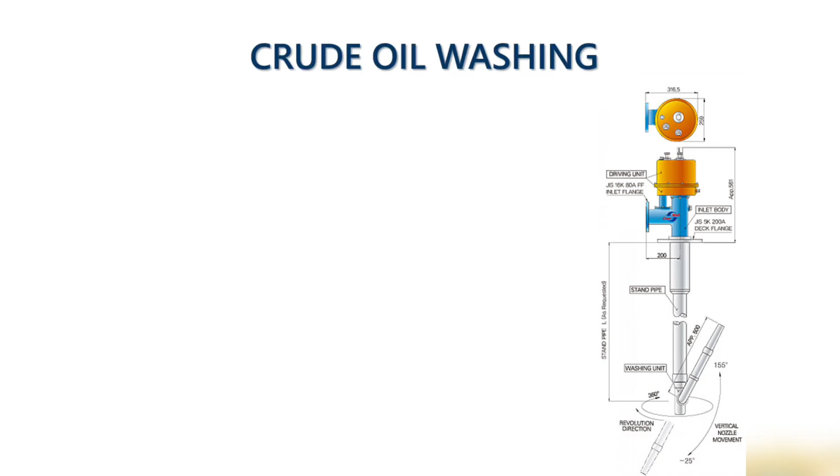And once the vessel goes alongside, discharges the oil, but sediment remains on board. The discharging is still carried out in the same way, through the ship's pump. The pumps can discharge only the liquid; they're not designed to discharge the solid part. So solid sediment used to remain on board.

So the receiver on the other side always used to receive less cargo than they had paid for, because the sediment, the solid particles, the sludge is also a part of the crude, which they never used to receive. So they are always losing money on that. They are receiving less cargo than what they have paid for.

Because ships also cannot do anything. This is unpumpable. This solid particle stays at the bottom and we cannot pump it out unless somebody goes down and shovels it off. So there was a loss of cargo. Receivers were not so happy.

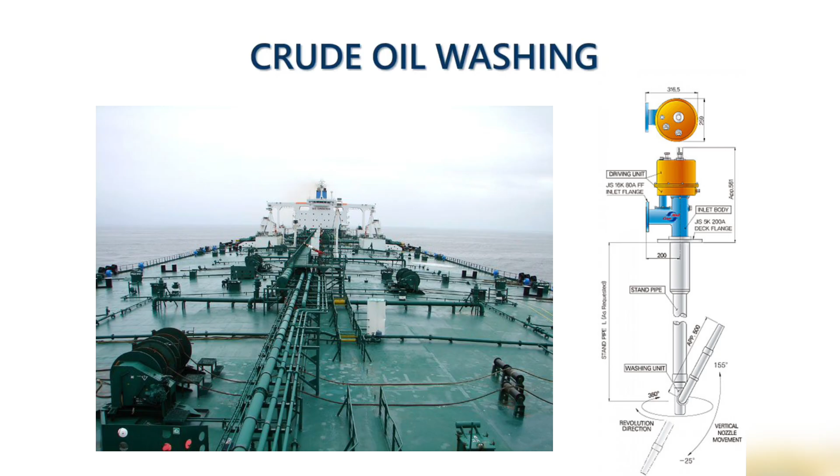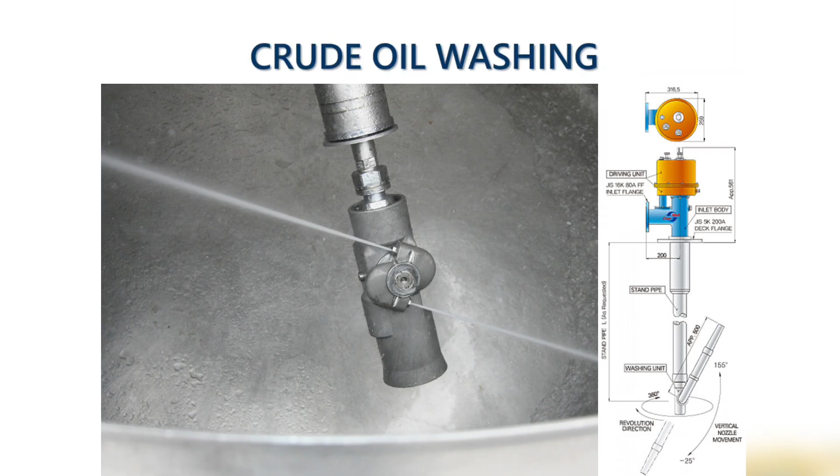On the other side, ship owners: when these sediments are settling down at the bottom of the tank, after every discharging the sediments are increasing. Because of these sediments, the total oil carrying capacity of the tank is reducing. So they are also losing freight, because the space is reducing every time because of these sediments, which are unpumpable. So they are also losing on the freight. Ship owners are losing, and the receivers, charterers, are also receiving less cargo.

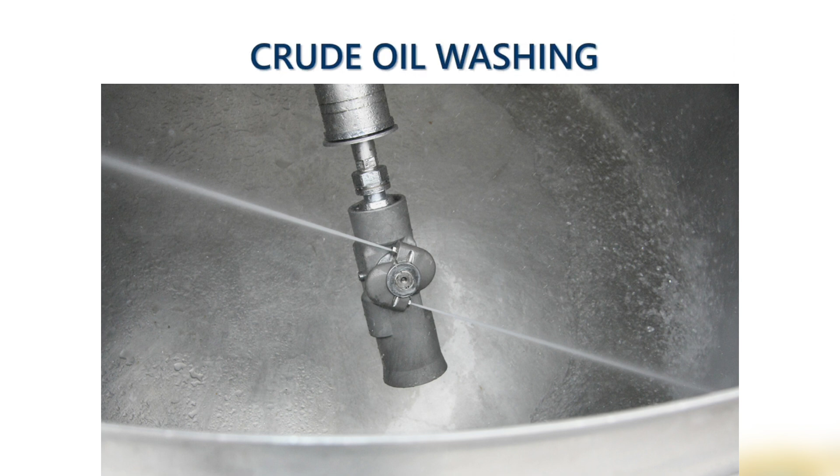Then ship owners decided that they will come out to the sea after discharging, wash these tanks with seawater, and throw this oily water overboard. Oily water along with a little bit of sediment would have gone. So by doing this, they started polluting the sea in a big way, so that they can achieve the freight the ship is designed for. At least they can carry the amount of cargo the ship is designed for. But in the process, they started polluting the sea.

This washing with water continued for some time, till crude oil washing came out. The R&D was still going on. The R&D department came with the solution that crude has a special quality. When the washing is done with the same crude, and this crude is put under pressure, it becomes very thin. Viscosity decreases. It becomes thin. When it becomes thin, it is very easy to drain, to strip the tank.

And when this oil under pressure through a nozzle hits the sediments in the cargo tank, the sediments get dissolved into this oil and become liquid, and this sediment in the form of liquid can be stripped, put in the slop and finally discharged to the shore facility. This unique property of this oil was used.

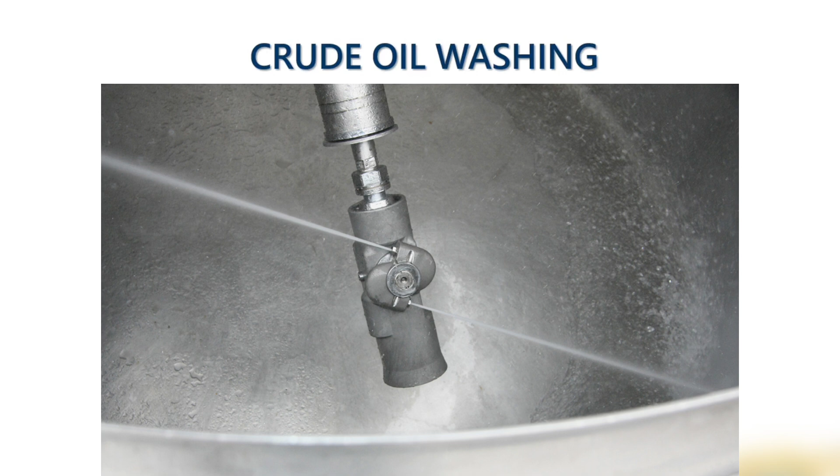By using this property, receivers started receiving the same amount of oil, maybe sometimes more. Ships started carrying the same amount of cargo that they are designed for, so they're also getting the same freight. The freight that they were losing, they started recovering. And the huge amount of pollution which was going on immediately stopped. So everybody was happy when crude oil washing was introduced, by finding the unique property of the crude.

If the same crude is put under pressure, the viscosity decreases, it becomes more thin, and when under pressure you hit this solid sediment, it turns into a liquid state, and the sediment along with this thin oil can be stripped and discharged straight to the shore facility.

When they used to wash it with water, the slop tank also used to be big, to store all the sediment. Oily water they used to discharge, but sediment used to stay in the slop tank. So in those days they used to have huge, big capacity slop tanks to store all this sediment, and they introduced the term load on top at that time, to load the cargo on top of this sediment in the slop tank.

So by doing this, by introduction of this crude oil washing, shipper is happy, receiver is happy, environmentalists are happy, no more pollution taking place. Ship owner is also happy that he's not doing any pollution. Not so much sediment on board now, so the size of the slop tank also reduced. And when you have less sludge, less sediment in the cargo, your outturn figure also increases. After this crude oil washing, the outturn figure and the efficiency of the ship also improved a lot.

ROB reduced drastically. Since the amount of sludge was less because of the crude oil washing, the time for gas freeing also reduced. The time reduced for desludging the cargo tank when the ship is going for dry dock. So ship owners are saving a lot of money on desludging. So this crude oil washing brought the revolution in the tanker fleet. Everybody was happy when this crude oil washing was introduced, just because of the unique nature of the crude.

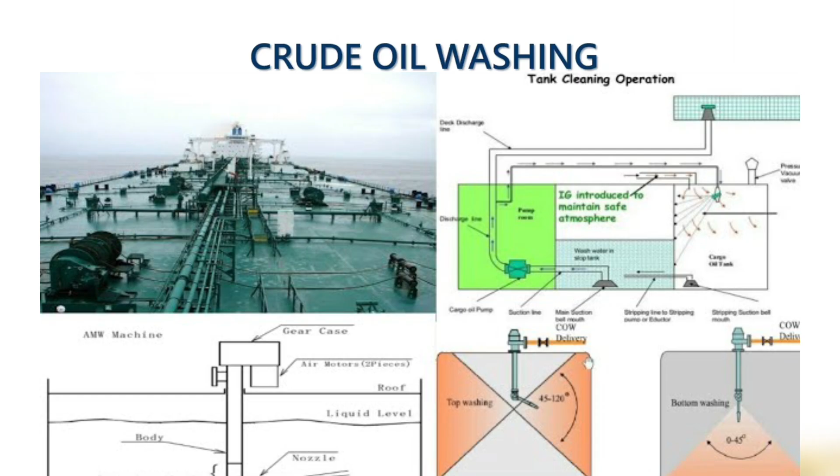So when this became successful, MARPOL came out with a requirement that if you are introducing a crude oil washing system on board, they put some regulations in place to be complied with by all the tankers that have a crude oil washing system installed on board. We will go through that. That's how the crude oil washing system was introduced.

Crude is a mixture of hydrocarbons consisting of gases, liquids and solids, depending upon the carbon content, and the solid constituents remain suspended in the liquid. During transportation from point A to B, these constituents used to settle down on horizontal and vertical structures, which were difficult to handle by the ship's pumps. The construction of the ship.

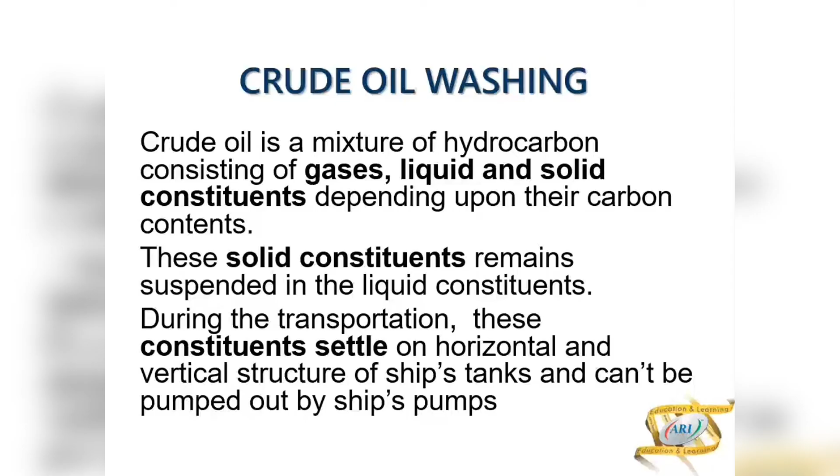These days, the ships are double hull. Those who have worked on a tanker will agree with me. These cargo tanks have very little stiffening. Few longitudinals and transverses are there in the cargo tanks. All the stiffening on the ship is towards the ballast tanks. So basically, the cargo tank is like the room where you're sitting. The bottom is plain. So with less obstructions inside the cargo tank, the flow of oil is smooth.

With the aft trim, the oil is flowing aft, which has improved the stripping system. Less clingage now because there are very few obstructions inside the tank. It's like the room that you're sitting in: all walls, overhead and bottom plain. So that has improved the outturn figure. Not only crude oil washing, but they changed the structure of the cargo tanks. All the tankers have become double skin, double bottom, double sides.

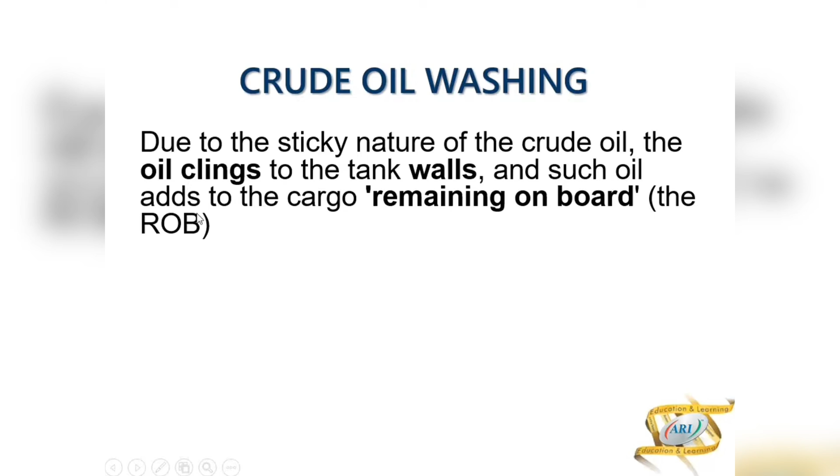All the oil compartments are protected by segregated ballast tanks, and all the stiffening, all the strengthening is done in the ballast tanks. So that also improves the efficiency of the vessel. Easy to strip the tanks these days. Due to the sticky nature of the crude oil, the oil clings to the tank walls, and such oil adds to the cargo remaining on board. So they used to wash it with water, as I said, and create marine pollution. Big slop tanks for storing the sediments, and load on top was introduced.

You have to take permission from the charterers: in so-and-so slop tank I have so much sludge stored, but there is still some empty space where I can put the present cargo. So for that, you have to take permission from the charterers. If he allows, then we can load. That is known as load on top.

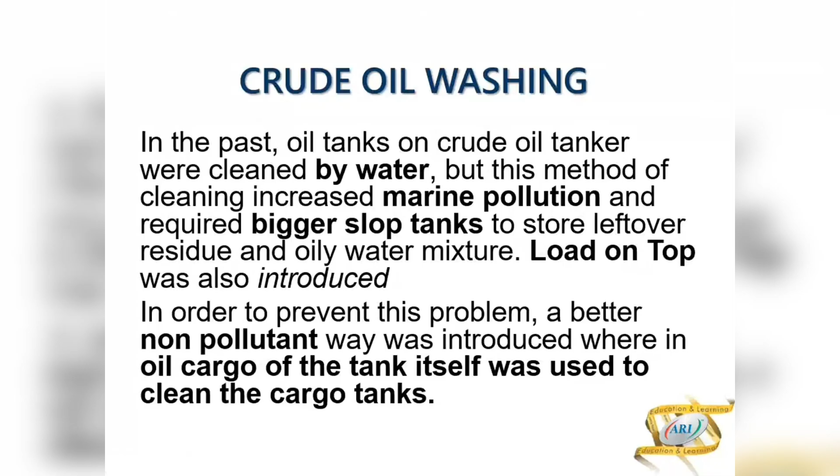So in order to prevent this problem, a better non-pollutant way, crude oil washing, was introduced, where the oil cargo of the tank itself was used for cleaning the cargo tank. Before, they used to clean it with water; now they're using the same oil to clean the tank. This process is facilitated because the viscosity of the oil is considerably reduced. It becomes thin.

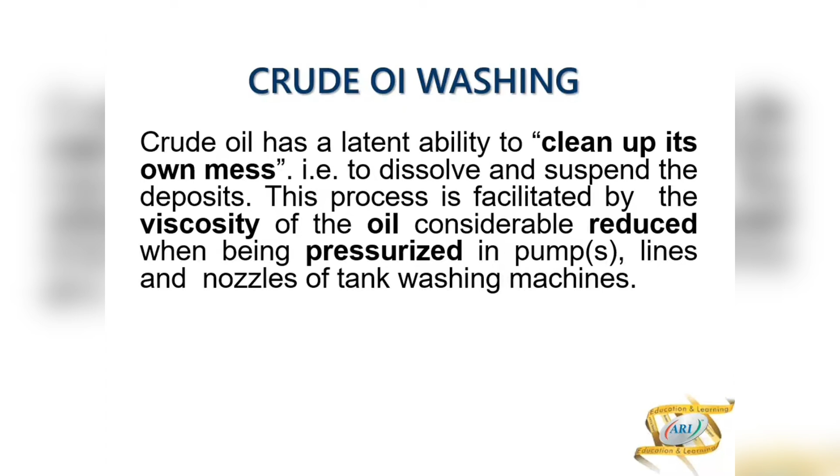Not high, reduced with the pressure. And when it becomes thin, it is easier to strip the tanks. It is good for draining purpose.

By performing crude oil washing in the tank, short form of crude oil washing is COW, the amount of ROB in the tank is significantly reduced, and with the current high cost of oil, the financial savings are significant both for the charterers and for the ship owners. Everybody is happy. Receivers are receiving the same amount of oil they have paid for, and ship owners are carrying the same amount of oil as the capacity they are assigned for. No pollution. Everybody is making money and happy about that.

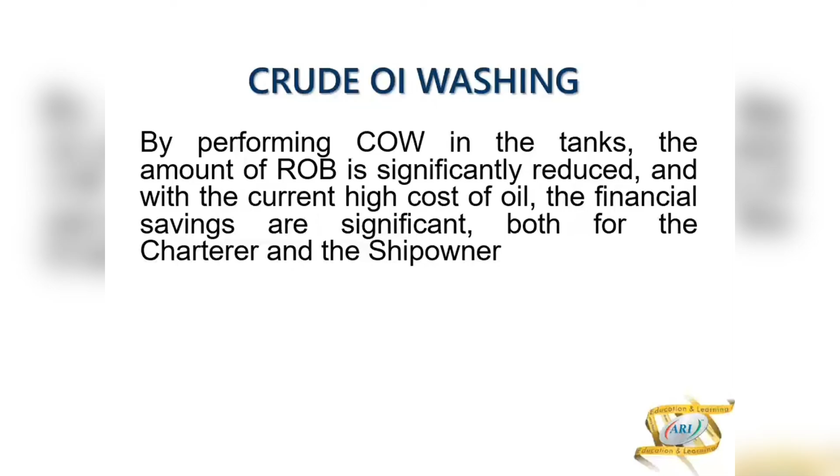As a result of the viscosity property, crude oil used for tank washing drains effectively, leaving only a surprisingly very thin oil layer upon the tank surface.

If crude oil washing is done properly, and if you have sufficient time in the port to do it properly, this is an excellent method for sludge control on the ship, an excellent method to keep an eye on the sludge and keep it to a bare minimum. Because if you don't do crude oil washing, the sludge amount will keep increasing, the constant of the ship will increase, and when the constant of the ship increases, the cargo carrying capacity of the vessel decreases. So sludge control measures have to be properly implemented, not just a paper wash. It has to be washed properly.

The superiority of crude oil over water as a tank cleaning fluid is exclusively dependent upon the dissolving property of the crude oil. The sludge dissolves in this oil and becomes liquid, making it easy for stripping. The pump and ejector are used to strip this oil into the slop tank, and from the slop tank it is discharged to the shore facility.

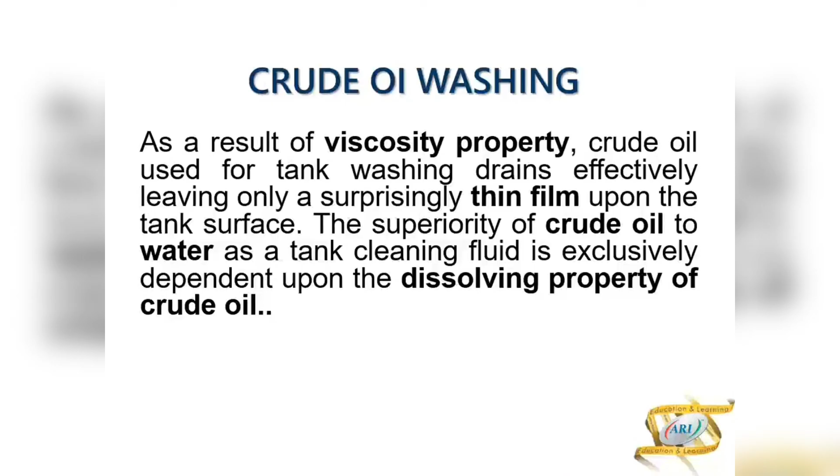Crude oil washing is the washing out of the residue solid constituents from the oil tanker using the crude oil cargo itself, after the cargo tank has been emptied. This crude oil washing is done once the cargo tank is empty, so only the solid sediments are remaining in the tank. Whatever the pump could pump out has been pumped out, and the pump loses suction, leaving only sediments remaining in the cargo tank.

At that time, crude oil washing is carried out under pressure, which plays a very important role. Pressure around 8 to 10 bars. Pressure plays a significant role in sludge control, and information about what pressure is to be maintained can be found in the crude oil washing manual. Whatever is mentioned in that manual must be maintained for crude oil washing. Only then is it effective cleaning in the tank, and effective sludge control can be done.

Crude oil is pumped back, preheated in the slop tank, then sprayed back with a high pressure nozzle in the cargo tank onto the walls of the tanks. That's how crude oil washing is carried out.

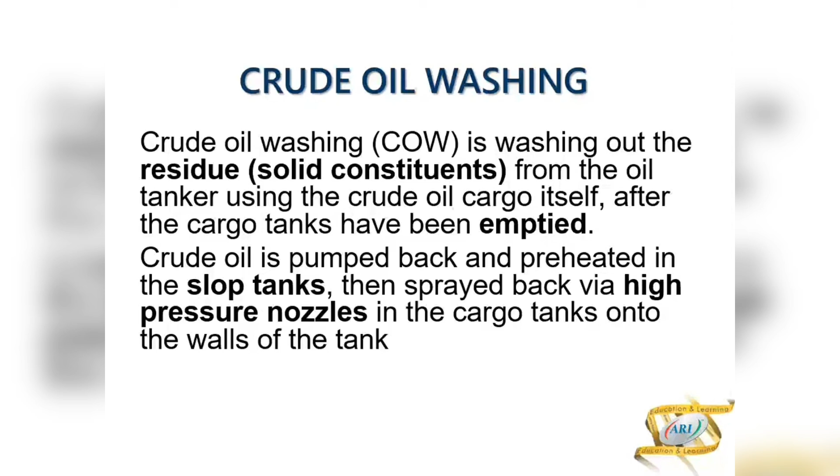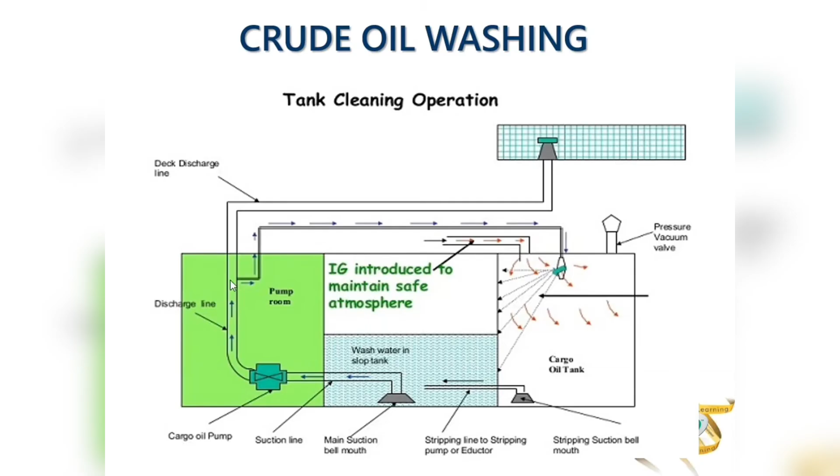All right, so regulation for the COW. Now MARPOL has put in the requirement. Since such a fantastic system has come into the tankers, everybody is happy. MARPOL put their requirement, their regulations in place that any ship having the crude oil system installed must comply with all these requirements. Then only they can get an approval certificate for that crude oil washing system.

Regulation 33, Annex 1, 20,000 deadweight and above, MARPOL says must have the crude oil system installed for every cargo tank. There should be skilled people on board who are properly trained to perform the complete operation. Skilled people are required, trained people are required as per MARPOL.

Nowadays we have a matrix. Sometimes even the VIQ also mentions this - you must have filled up VIQs. There's a questionnaire there: what is the experience of the master in crude oil washing or STS operation out in the crude oil carrier or this kind of vessel? What is the experience of the chief officer? They want experienced and trained, skilled people to carry out this kind of critical work.

Critical in the sense, this is a high pressure job. Crude oil washing is done under high pressure, 8 to 10 bars. Any small leak in the system overboard, and you can create a pollution. So to avoid that, responsible people has to be there, skilled people has to be there. A senior officer has to be there in the cargo control room when the crude oil washing is going on.

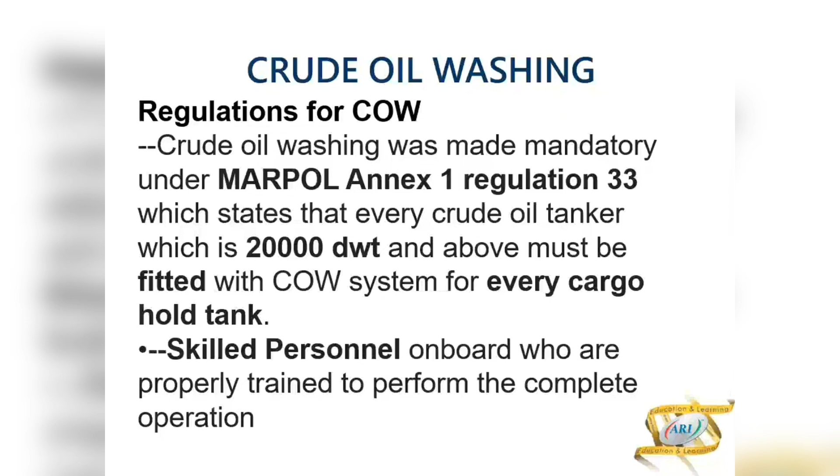Go ahead, somebody is talking.

This crude oil washing system, administration shall ensure that the system fully complies with the requirement. Now the flag state also has come into being. MARPOL requires administration to make sure that it complies with all the requirements for the specifications, for the design, for the control, for the equipment required for crude oil washing. The flag state has to ensure that the vessel complies with all the requirements.

Within 1 year of its service, from the time it has come out of the yard, it must get the approval certificate from the administration within 1 year of its service, or third voyage, end of the third voyage, whichever comes later.

So there should be an approval certificate for the crude oil washing system, which is given by the classification society surveyor, who comes on board on behalf of the flag state to carry out the inspection. During the crude oil washing, he is present, he is watching, and he checks the quality of cleanliness, quantity of sludge remaining after the crude oil washing in each tank. Once he is satisfied, then only he gives the certificate of approval for the crude oil washing system, and at the same time he approves the crude oil washing manual.

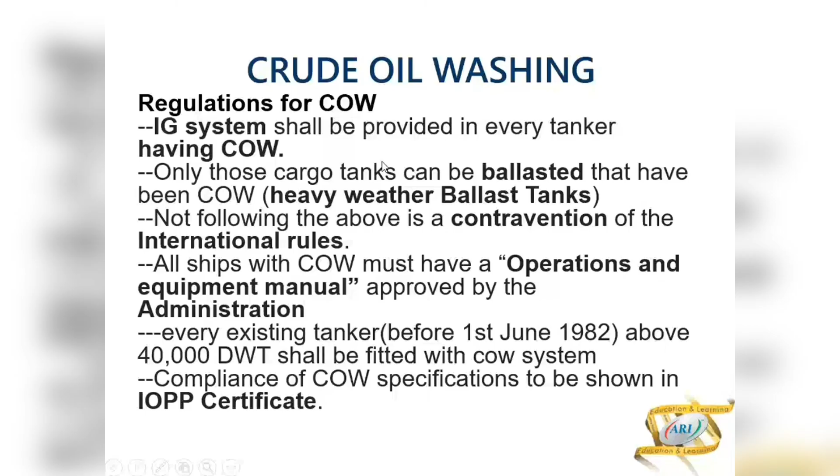Any question? Sir, is it necessary to have a heavy weather ballast tank? Say what? Come close to the mic, can't hear you. So is it necessary to have this heavy weather ballast tank? Because I remember a captain telling me our ballast tank capacity is a few tons less, else we would not be having these heavy weather ballast tanks.

No, the heavy weather ballast tank's purpose is something else entirely. It's nothing to do with the SBT capacity. As I said, we are not allowed to take ballast in the cargo tanks first, because we are complying with all the requirements, because our SBT quantity is good enough, sufficient enough to comply with the MARPOL requirement.

Okay, you will find it there. Find it yourself, because people say many things. Now we are coming across the heating coils too - everybody does it, because there's a lack of knowledge.

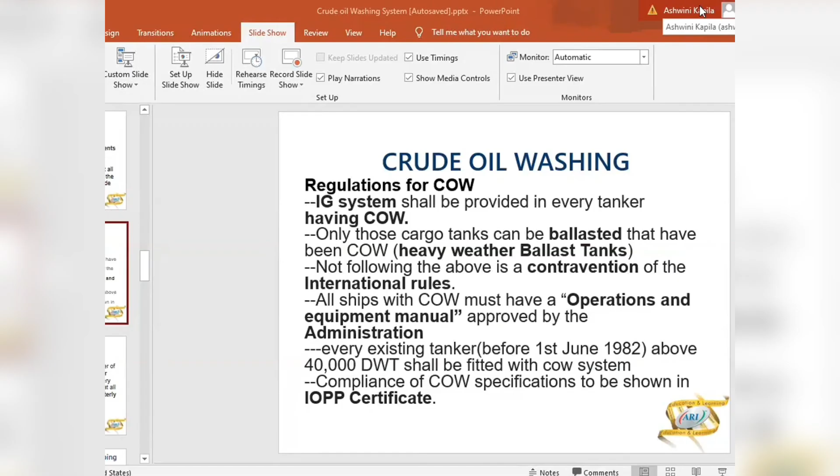I'm surprised the master didn't interfere when somebody was spoiling the heating coils on board. Heating coils are the heart of it - you earn so much money because of the heating coils on board. It has to be protected properly. Next time I will discuss this in detail.